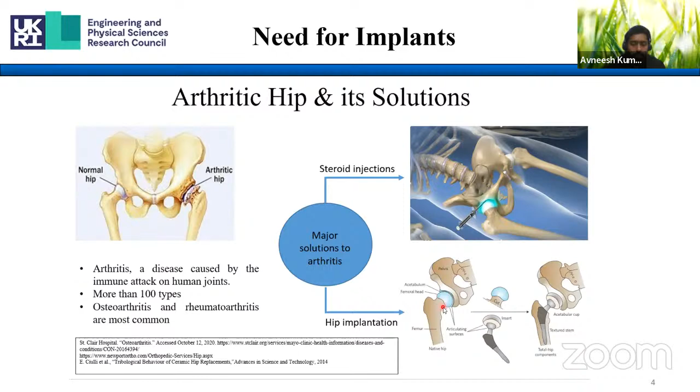The manufacturing of these implants is basically a two-step process. In the first step, they prepare the base part of the implants using advanced manufacturing techniques like additive manufacturing or casting. For that, people usually use stainless steel, cobalt, chromium, titanium, and also some polymers like ultra high molecular weight polyethylene, highly cross-linked polyethylene.

Then, to further enhance the properties of the surface of these implants, surface modification techniques have been used. They have tried machining these implants to get better tribological properties, or in some cases tried to improve surface roughness to get better biological properties, using grit blasting. Also, people have used coatings to get better biological, mechanical, or chemical properties.

For coatings, people have tried different materials, including titanium based alloys, hydroxyapatite, alumina, zirconia, and many more. The technologies explored include physical vapor deposition, chemical vapor deposition, sol-gel deposition, and thermal spraying. Thermal spray is also accepted as a biomedical coating technique by the US Food and Drug Administration.

In thermal spray, as we know, it basically contains three parts: one is the material that we want to deposit, another is a heat source required to melt or semi-melt this deposited particle, and then there is a carrier gas which propels this molten or semi-molten particle onto the substrate in order to form coatings.

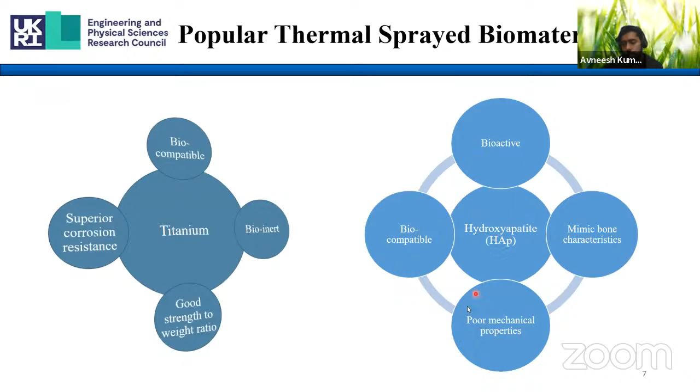On the other hand, hydroxyapatite is a mineral which mimics bone characteristics. It is a calcium phosphate compound, very biocompatible, but also bioactive in nature, which means it helps in bonding between the bone and the implant surface. It also helps in growth of cells onto these implant surfaces. But the problem with this material is its poor mechanical property.

In view of this, Professor Christopher has already discussed in his talk that they have developed coatings of calcium silicate compounds, which is baghdadite, using plasma spray, and they have also prepared hydroxyapatite based coatings, then compared both coatings in terms of their mechanical performance and biological performance.

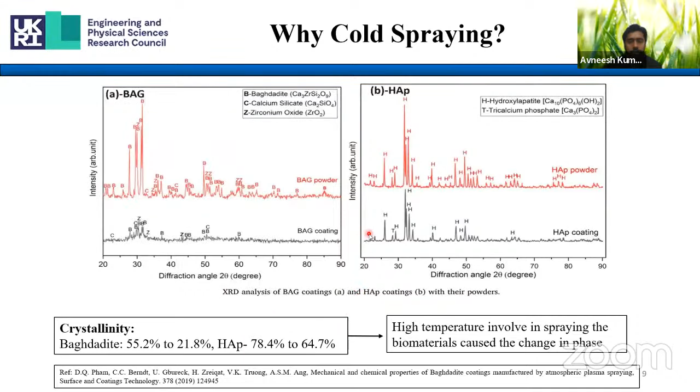So this phase change problem can be avoided using cold spray facility, because cold spray is basically a solid state deposition technology where micron size powder particles are propelled with supersonic velocity and strike the substrate to form bonding, mechanical bonding or metallurgical bonding. So to attain that supersonic velocity, a convergent divergent type of nozzle can be used.

So after that, as the particle strikes onto the substrate, it forms bonding, and that bonding can be described using several bonding mechanisms.

So the first one is oxide layer breakup. When this particle strikes with very high velocity onto the substrate, it breaks the oxide layer if there is any on the substrate, and forms a new surface for the bonding.

Similarly, there is another bonding mechanism which is adiabatic shear instability, which says that for a particle to adhere, there is a threshold value of velocity which it needs to reach. At that velocity, when it strikes, the particle deforms severely, along with a sudden rise in temperature observed at that particular velocity, and also the particle loses its flow strength. So when these three things happen together, this condition is known as adiabatic shear instability.

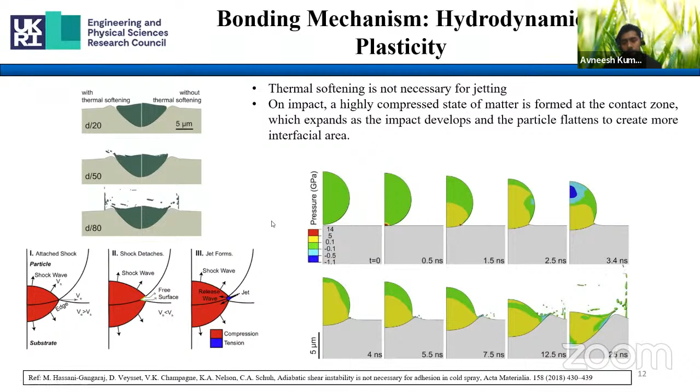Till now we have talked about metallic material bonding. Now what about ceramic particles? To see whether a ceramic particle retains onto the substrate surface, Rohan Chakrabarti with his group did simulations on different substrate conditions from softer to harder, and he saw that on a harder substrate the retention was minimum, but on a softer surface the retention was there.

As we all know, when a ceramic particle strikes with very high velocity, either it gets ruptured, fractured, fragmented, or it deforms very minutely. The retention of ceramic particles on the softer surface is connected with the crater depth - more the crater depth, better the retention. However, they said that if jetting occurs at the interface, then the retention will not be there, because this jetting will take the fragmented particle out from the surface.

Then they also saw the effect of grain size of the ceramic particle on retention. For that, they took a titanium oxide particle and impacted it onto a copper substrate with different grain sizes. They saw that a higher grain size particle retains more after impact, and the reason they gave is that the dissipation of kinetic energy through fracture is lower in this larger grain size case.

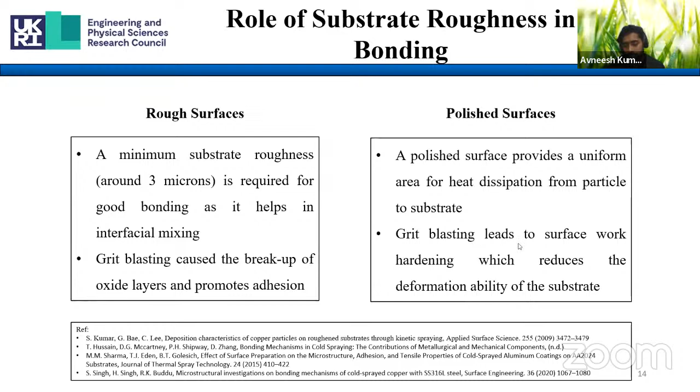So AR stands for as-received substrate. As-received means the average roughness value is around 5 microns, and for semi-polished it was around 0.5 micron, and for mirror polished surface it was around 0.03 micron.

As we discussed above in the bonding mechanism, jetting is the main reason for bonding. So to further see what is happening at the interface, we did some cross-sectional SEM image analysis of cold sprayed titanium particle.

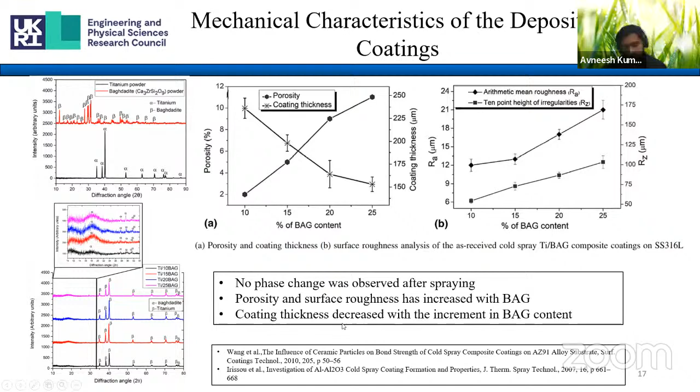Then we did some biocompatibility analysis. We put our already deposited coatings into an osteoblastic cell culture for 24 hours and monitored the cell viability, which is simply the live cells. The threshold value was 70%, and we were able to achieve more than 70% cell viability, which shows that all the coatings were biocompatible.

After that, we did some corrosion analysis in a simulated body fluid environment, that is Ringer solution, and we found that all the coatings were successful in protecting the substrate from corrosion. As the baghdadite content increased, the coating shifted towards the noble direction, meaning the stability of the coating increased in that environment.

We also did some SEM and EDS analysis of the corroded coatings to see what is happening on the surface, and we found that in all cases, oxygen content increased immensely. We also mapped the titanium 25% coating and found sodium, calcium, oxygen, silicon, and titanium present.

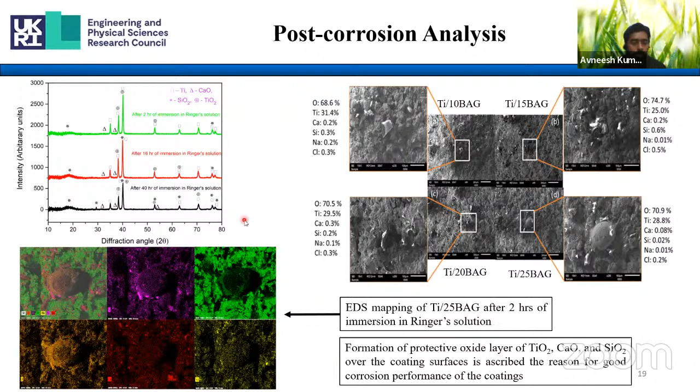To confirm whether oxide layers formed that protected the substrate surface, we did some XRD analysis. In the XRD, we found calcium oxide, silicon oxide, and titanium oxide, which helped protect the substrate from corrosion. Actually, they worked as a barrier to prevent electrolyte from penetrating through the coatings.

After that, we did some similar performance analysis using the pin on disk test. Before doing that, we did some micro hardness analysis on the cross section of these coatings.

From the cross-section micro hardness analysis, we realized that as the baghdadite content increases, the micro hardness value also increases, but there is a threshold value. After 15%, it decreases continuously.

This may be because as baghdadite content increases in the feedstock, it also influences the bonding between particles, interparticle bonding like between baghdadite and titanium, because it will interact with the titanium particle and affect the impact velocity of those particles. This further affects the deposition, so the cohesion strength of the coating also gets affected. That can be the reason for the decrease in micro hardness value.

In dry condition, we found that only one coating was able to protect the substrate, the titanium 15% baghdadite coating. However, the hardness of the 10% coating is higher than the substrate, and as Archard's wear law says wear rate is inversely proportional to the hardness of the coating surface, still the substrate had better wear resistance.

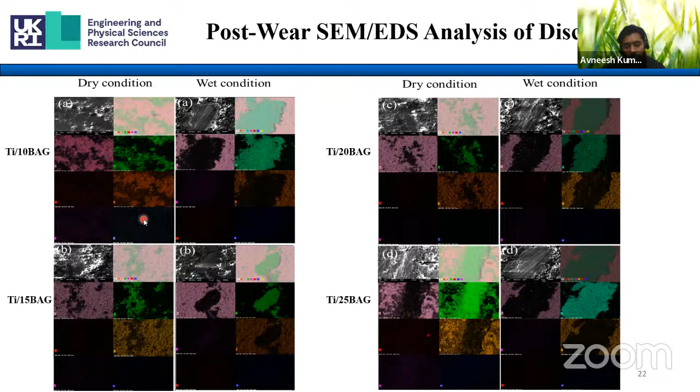The reason for that can be when one surface is rubbing the other, there will be a high temperature rise at the contact, and that high temperature rise causes the development of a weld junction between the coating and the substrate. This leads to transfer of material from the softer surface, the coating, to the counter surface, the alumina.

From this we concluded that we were successfully able to deposit a titanium based composite coating on SS316L substrate, and a significant amount of baghdadite was retained in the coating. The coating protected the SS316L substrate from corrosion because of the formation of calcium oxide, silicon oxide, and titanium oxide protective layers. Among all the investigated coatings, the 15% baghdadite composite coating was found to be the most successful in enhancing wear resistance.

This is because of the superior wear resistance and superior hardness of the 15% baghdadite composite coating. The wear mechanism we found was micro cutting, micro cracks, pitting, and delamination, which are features of abrasion. We also found mass transfer, which is a feature of adhesion, on the alumina counter surface.

After that, we also did some post laser treatment of the coatings, which we have not shown here, and those results are under consideration in a journal. So yeah, thank you for your patience.

Now I think I'm open for questions.

Thank you, Avneesh. Excellent presentation on the cold spray. So far it has been only on pure metals, ductile elements, and this is an eye opener to mix ductile with a brittle material to spray. I think it's a great initiative.

So my question was, if you sprayed it on 316, which is a hard substrate, right? Yes, sir. And you were able to get good adhesion with micro polishing, mirror finish kind of surface, right? Yes, sir, yes sir. So in the real world, if you were to do it, there will obviously be some challenges. If we have to do it on an implant, we obviously cannot get a mirror finish, but what do you think can be done there in a commercial world? How can we improve the adhesion of this material to commercialize it?

So, sir, initially, as I started my talk from the grit blasting thing, people were saying that grit blasting is good for adhesion. And then we have seen that mirror polish also helps in better bonding. But there are some cases where people say that whatever surface we receive in industry, or for implants also, that will give good adhesion, but relatively mirror polish substrate surface is giving better adhesion.

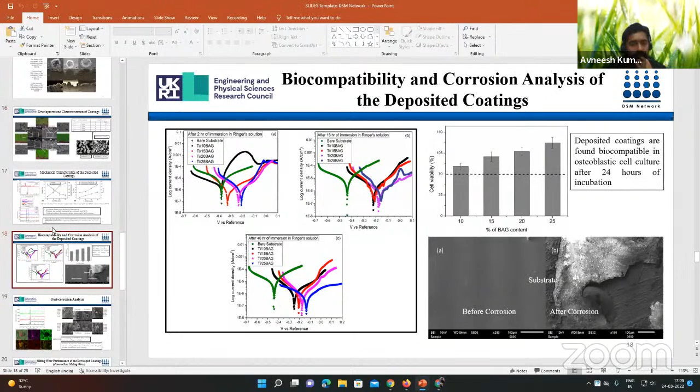In some cases, people have shown that surface preparation actually affects these properties also, like corrosion performance, and also properties like elastic modulus, micro hardness, or maybe in some cases thermal conductivity. People have reported that it gets influenced because of surface preparation. So that can be an interesting thing to look for.

Sure, I think very impressive work. Congratulations. Thank you very much, sir. Okay, thanks a lot, Vish.

So Avneesh, I have a few questions, not technical type. I see that you were present in some of the other talks also on the same days. So as an ECR, how do you see this type of event has benefited you or groomed you with this kind of exposure to talks from other experts? How has this helped you and your career?

So sir, first of all, I would like to say thanks to the DSM Network also, because they have given us the opportunity to understand what is going on in thermal spray area nowadays. We have learned a lot from the experts, like what type of work they have done in the area of thermal spray. I am now aware of biomedical things and what my supervisor is working on nowadays. But when you see around the globe, how people are working in thermal spray, how they try to improve facilities, and how they try to predict different properties of coatings, like using AI or simulations, that is quite interesting to see. So it helped me immensely to know about things which I never knew earlier. It was great help.

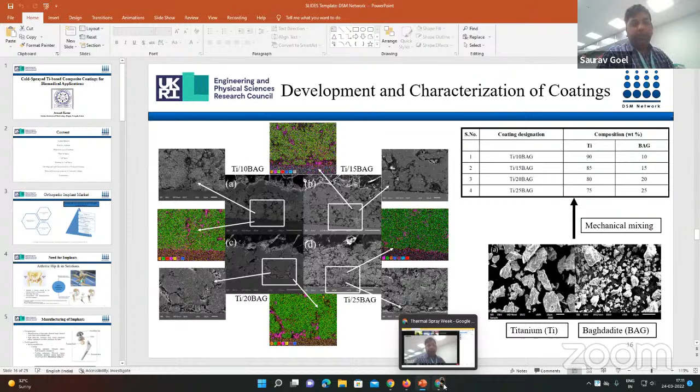Okay, and in your own perception, or in your own judgment, because you are coming from IIT Ropar based in India, which area in thermal spray manufacturing do you see that your institution or India needs more push or momentum?

So right now, I think this biomedical thing is very important and very interesting. Very few people are working on it in my IIT, I think nobody is working on these things. Harpreet sir is working in thermal spray, but not exactly for the manufacturing of implants. So we have explored the coatings, but not exactly how we can prepare the full-fledged implant. So these things, I think, we should look for. Other than that, hot corrosion, that is sir's expertise, in hot corrosion and cyclic oxidation type things. They have published some patents also on that. So in that way we can improve the performance of different components in industries, and it can help economically also.

Okay. And in your personal ambition, do you have aspirations to join academia or to go to industry? No, sir, I wanted to do some research things, from the academia point of view, and then I'll see what opportunity I will have, because I want to explore more in research things, maybe in industry also.

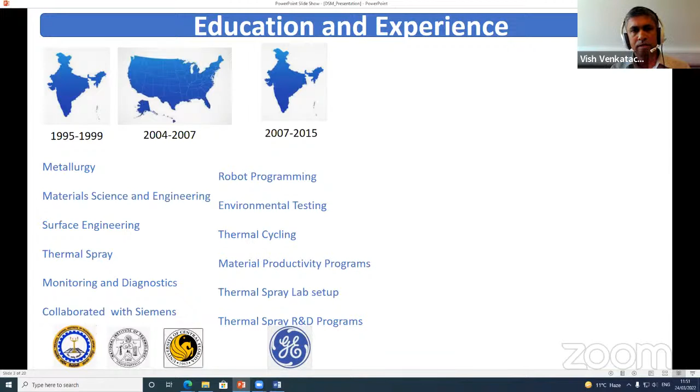We ran several R&D programs for oxidation coatings, like high melting point bond coats for thermal barrier coatings. So primarily I worked on the new make side of GE to develop coatings. Then I had an opportunity to move on to the repair side.

From 2016, I moved to the Middle East, looking at coatings repair, diffusion coatings, non-standard offerings for Middle East customers. Robotic programming was still part of my job on the repairs portion of it, and I developed a lot of coatings for the Middle East customers, power generation for the 6B and 9E turbine frames.

Shortly after that, I moved to Southeast Asia, primarily based out of Singapore, for GE, working on aeroderivative engines, coatings for the LM2500, land and marine, we call it. There is plenty of coatings that goes into that product. That engine is used primarily for propelling the ship, as well as small scale land turbines.

Most of the coatings that you will see coming out of Southeast Asia, the parameters were probably developed by me for the last 3 years. It has been a big privilege for me to develop and deploy coatings for manufacturing such high technology applications.

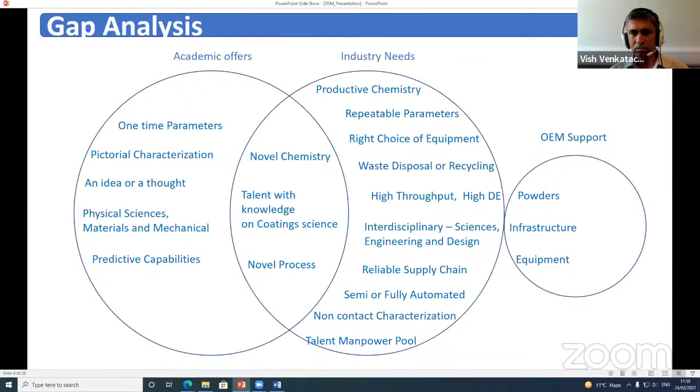If you look at sustainable thermal spray, the first thing to consider when spraying a powder or a coating is: OEM will give us a parameter—is it relevant to my equipment? You might have an HVOF system, but the OEM powder is actually made for plasma spray. So things of that nature.

Do we have the gases that the OEM is suggesting? And if I take that OEM parameter and spray multiple times, am I going to get a repeatable microstructure? Am I using the right gun to not waste a lot of powder? Am I putting a lot of powder on the floor?

Can I improve the deposition efficiency? Can I spray faster for the same thickness and get the parts out? Is there a better gun to save cost and time? Can I use a larger bore plasma spray instead of a narrow bore? And what is the long-term maintenance cost of the equipment? Am I going to keep changing my nozzle and hardware, or my chiller system or power supply, to sustain that kind of customer volume?

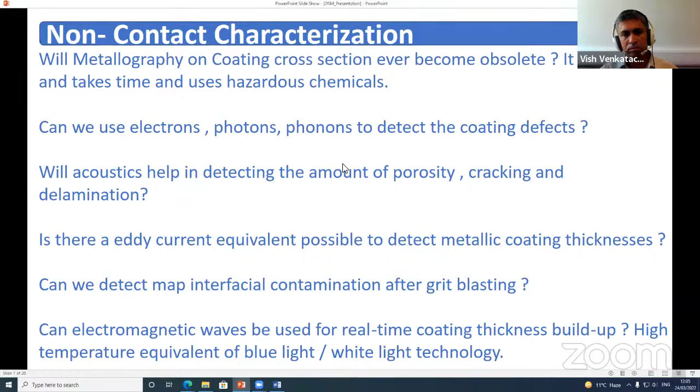More often, the cutting edge talk going on in industry is whether we can use electromagnetic waves, not just light in the optical range, to determine coating thickness as the coating is depositing live. Right now, there are white light and blue light technologies available after the part is coated and cooled, but not to an extent where, when it is currently being coated, we have that technology to take it forward.

So thermal spray has a lot of variables, right? It's going to be confusing for a novice to look at so many parameters and see which ones to change and which ones not to change. So if you have to end up automating this process or semi-automating it, what are the things we need to look at?

Primarily, we have gas flows, spray distance, robot speed. Can we turn these knobs favorably to get a coating, right? So what we do now is an Accuraspray window wherein we study the temperature, velocity, and intensity of the plume, and say everything is within range, and we get the microstructure out.

The next feature, which the industry is going to demand and we have to move towards, is getting these parameters in a measurement window and changing the gas flows and input parameters seamlessly and automatically using a robot.

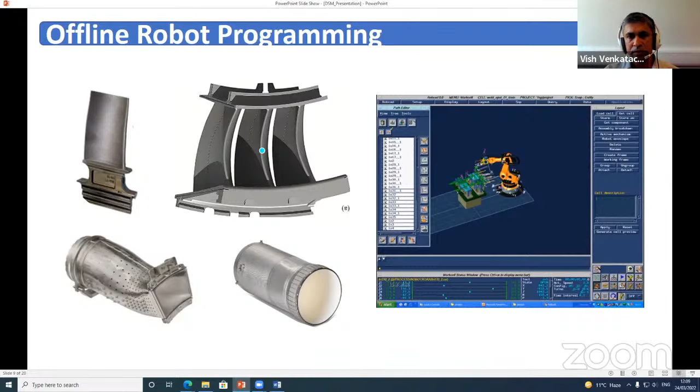A lot of work is going on to substitute for yttrium. Please note that these lanthanides are available in only one country in the world, and we don't know how the supply chain is going to be, in terms of whether we're going to keep relying on that one country to supply thermal spray ingredients to the whole world. We need to look at alternatives, right?

How can we move away from this? Yttrium itself is a critical raw material, and so are many others—for example, chromium is hazardous. How can we move away from chromium? Can we use less nickel, less cobalt? Recycling is key to avoiding tapping into this lanthanide series, and it's a must. These are the challenges materials-wise, and now industries are talking about hydrogen turbines and high efficiency turbines, right?

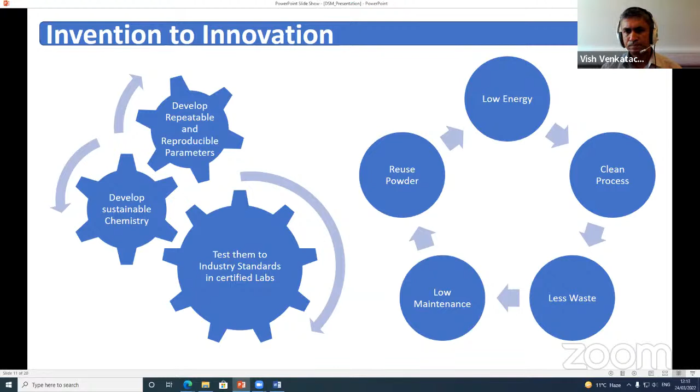Looking at some of the opportunities, I've jotted down a few here. Can we look at improving the manufacturability of perovskite cells, calcium titanate, using thermal spray or solution precursor plasma spray? That would be a great approach. It's a niche area, and I think a lot of renewable industries would be more excited to get that kind of technology.

Erosion in wind turbine blades is still a problem. We have wind turbine blades in GE, especially. If you look at some of the high rain monsoon areas, the rain droplet sizes are so small that the leading edge of the wind turbine gets eroded, and sometimes we have to scrap the whole blade, which is a highly environmentally hazardous way of disposing those blades. So if we can use thermal spray to do erosion protection of those leading edges, it will be a great support.

Another option I was thinking of: with so many stainless steels just to keep them from corrosion or erosion, hardness, high hardness, tool steel applications - if we can induct more carbon steels just by doing thermal spray substitution, I think we can save a lot of energy and save a lot of nickel and chromium.

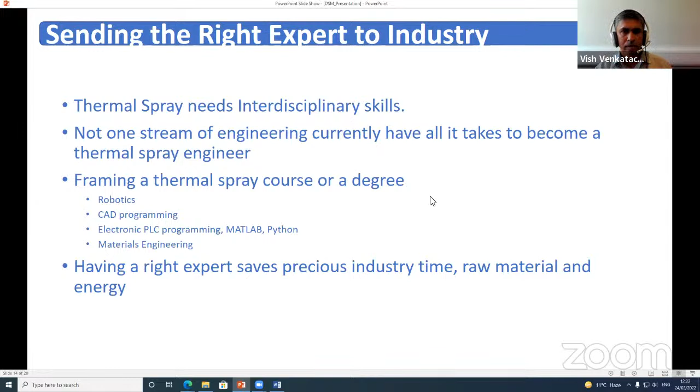I think we could take out hydrocarbons, acetylene, and similar things, and instead use hydrogen as a process fuel, along with argon and helium, which would contribute positively to the environment. Also, a lot of epoxy products get wasted during thermal spray - masking is a big waste that gets generated and goes to landfill. If we could have sustainable organic masking technologies, it would help reduce this waste.

Here are a few more thoughts on how we can collaborate. Polyesters are used in abradables, like the shrouds of turbine engines, the blade tip, and the casing. Polyesters increase porosity in TBCs to get that abradable functionality. If we could inject more recycled polyesters into abradables, I think we have a good scheme of things there.

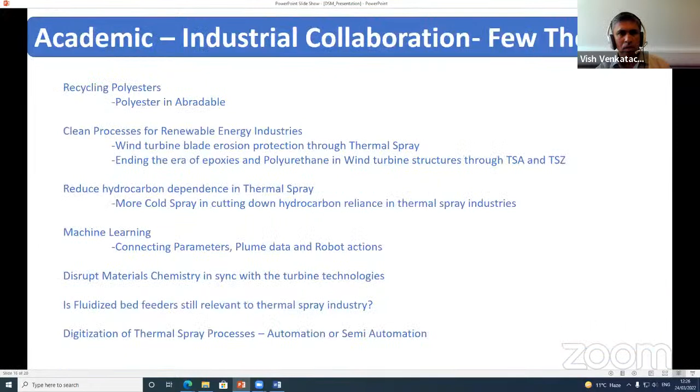So with that, I think I'll just briefly go through what I have done in my PhD. I've developed some free-form nanostructures like tubes and rods using cermets and aluminum oxide, using thermal spray and solution precursors, plasma spray.

To improve the flowability, I have used spray dryer of these nano powders. Mostly ceramics and nitrides and polysilicide, hafnium tungsten, hafnium carbide.

I think we could scale up. All these technologies can be scaled up, and with the right talent, we could work more closely and collaborate to get things done.

My experience is mostly on thermal spray, monitoring diagnostics. I worked with these guns, and we should be able to collaborate.

We have a thermal spray facility in London South Bank University, mostly plasma spray, but we could do a lot of collaboration in terms of leveraging each other's infrastructure needs, like cold spray in India and solution precursor spray, plasma spray in University West.

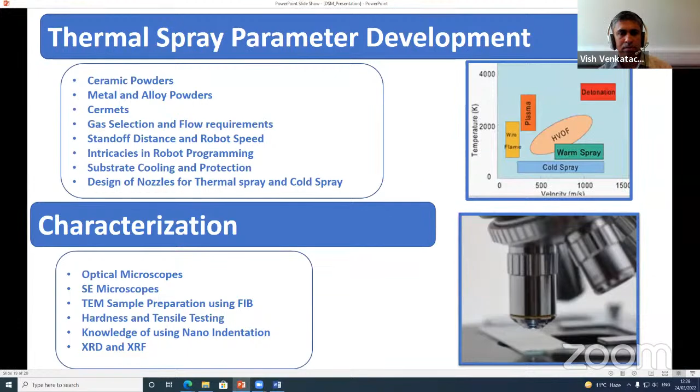So with that, I would like to end this presentation. I think it's running about 45 minutes, and yeah, so we will work more closely with these networks and technologies and with the right talent. I think it's time to work together.

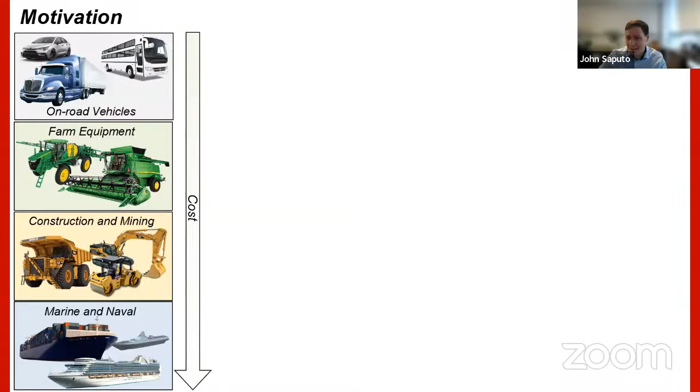I apologize, these are all in American units, everything I'm about to show. I probably should have thought about putting these in SI, but hopefully this still translates well. As you go down in this list, you increase in cost generally. Something like an on-road vehicle will be on the order of $10,000 - your car will cost $10,000, $20,000, and maybe something like a bus or truck will be a lot higher. But just for demonstrative purposes, I think this is suitable.

As you go down, you approach marine and naval equipment that can often be on the order of $10 million. At the same time, the difficulty of replacing internal combustion engines in these systems also increases. That's a hard metric to really hammer out, but I chose to look at torque in these systems - a metric electric motors generally excel in. Something like your car, in English units, would produce on the order of 100 foot-pounds of torque.

Maybe that's something like 150 Newton meters. Then as you get to the other end of the scale, something like marine and naval engines are producing on the order of 1 million foot-pounds of torque. It's one of these applications where there just isn't a practical alternative to an internal combustion engine.

At the same time, the environmental impact of these things gets worse and worse as you move down in this list. That's difficult to quantify, but I'm putting this in cumulative tons of CO2 emitted by each category. If you look at all on-road vehicles in the world, they produce something like 10 to the 9 tons of CO2. As you go down the list, you see it immediately drops down and then picks back up again.

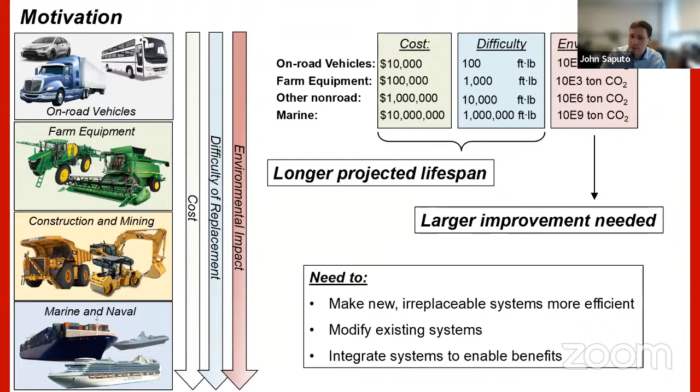So I'm going to call out 3 specific things that I think we need to do here. One is to make these new irreplaceable systems more efficient. The second is to modify existing systems to be more efficient. And the third is to integrate these systems into more environmentally friendly areas.

So the first example I'll give is a container ship. This is a Wärtsilä-Sulzer 96C engine. You can see there's people in that bottom image, and these things are the size of a house. I think this specific engine outputs about 7 million foot-pounds of torque, and there's literally no replacement for this thing out there.

The second example I'll give is military combat vehicles. A lot of these things have very specific performance requirements that there aren't a lot of alternatives to, and they tend to have really long lifespans. This is a vehicle that was introduced in the 1960s that's still in the field today. You can see that they're constantly introducing these things that rely on these sort of old dirty technologies, and are expected to have very long lifespans.

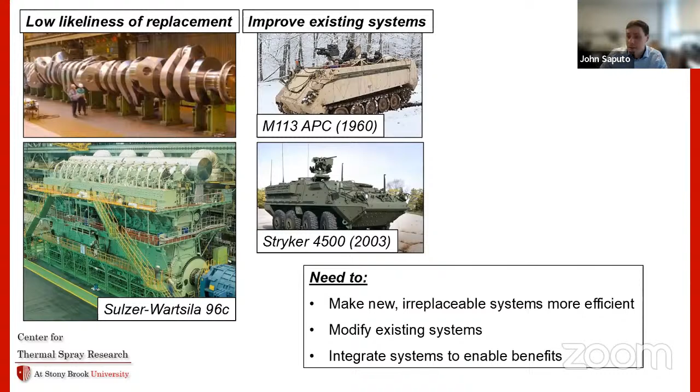At the same time, you have things like integrating them to enable systemic benefits. So this is an example of things like wind or solar that produce intermittent power, and you could possibly supplement those things with internal combustion engines, which can ramp up to produce power really rapidly, which is a kind of unique attribute of those systems.

So altogether, you're probably not likely to see any of these things have practical replacements for 50 to 60 years. So even though environmentally friendly green technologies are really popular and have a lot of research going on in them, there's still a deep need to pursue higher efficiency in these systems.

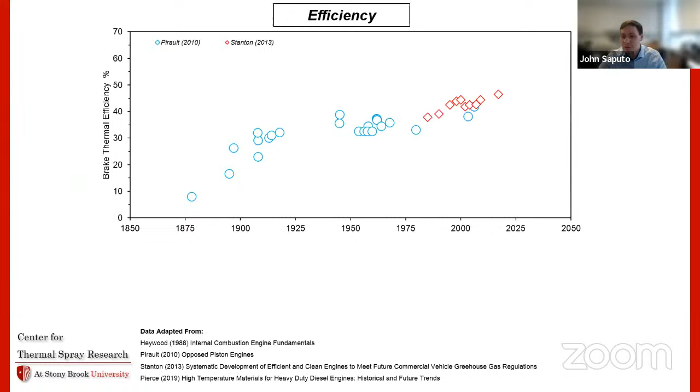So talking about efficiency, it's good to give you a lay of the land. What does it actually look like for these systems? You go back to the 1870s and you can see Rudolf Diesel's first engine had an efficiency of about 8%. And you go to a modern day high output diesel engine from 2020 at the other end of this, and see it's about 46%.

So it's interesting, you get about a 40% improvement over the span of about 150 years. Over the past 70 years, you only see an 8% improvement. So that's kind of interesting. Things saturate after about 50 years of improvement and have gone really slowly since then.

So if you look at this in the future, what do people expect to happen? There's projections that in the next 30 years or so, you'll see about a 14% improvement in efficiency in these systems. Considering that there's only been 8% in the past 70 years, 14% seems like a suspicious number.

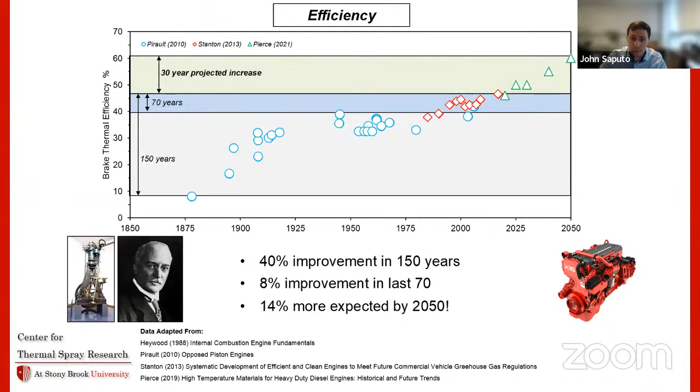But you can look at how people in this field project that this will actually work. So there's a couple of things that people look at. The first is looking at efficiency versus peak cylinder pressure.

Some of the ideas that people have in this field is that you can just increase the working pressure that these things operate at. You increase the amount of work that comes out of an engine, and the efficiency of it will go up. So increasing the pressure has a direct correlation to increases in efficiency, and is projected to have about 1 to 3% impact on that total 14% that I mentioned.

So looking at each of these things, this first option is systemically simple. It's just a simple modification to the way that you're already running an engine, but because you have these increases in pressure, it's thermodynamically linked to temperature, and you start to push the thermal limits of the materials that are used to make these engines.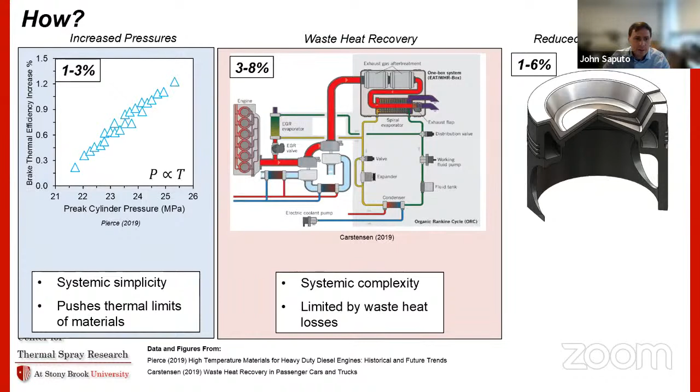The middle option here is systemically complex but readily achievable, and is also thermally limited. So you're not pushing the thermal limits of materials in these systems, but you're limited by waste heat through the

hot gas pathways in an engine. And this third option is also systemically simple. You don't need to add an extra system to a diesel engine. You can just modify existing components to possibly gain additional performance benefits. But again, it needs unique thermal insulating materials. So these are three categories of things that can all be enabled by the use of coatings.

So I'm going to talk about this reduced thermal losses mostly, and then maybe loop back to this first idea of increased pressures and the thermal limits of materials if we have time. So, reduced thermal losses - I have a little subtitle there, or 6 years of TBCs at the CTSR.

So we've been working on this idea in collaboration with the US Army for around 6 years now. And if you look at the total fuel energy that goes into an engine, about 50%, 55% of that is actually losses, and 45% of it goes to usable power. Of those losses, about 25% are thermal, 30% leave through the exhaust gas, and then there's some other portion of that that's mechanical frictional losses and things like that.

Of the 25% that are thermal losses, about 23% leave the system during the combustion, expansion, and exhaust strokes. And then about 2% of that is heat that's generated by friction. So from the 23%, there's 19% of that that just goes out of the system as waste heat, conducts through the walls of the piston during those strokes, and about 6% that's potentially usable as work in these systems.

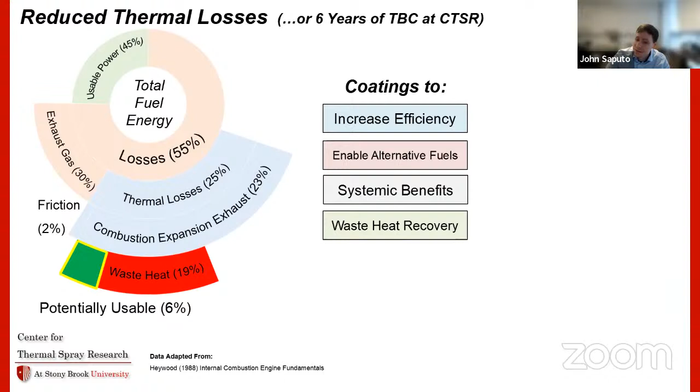So part of the idea is that you can use coatings in these systems to directly increase the efficiency by harnessing that potentially usable energy as work. But there are a couple other things you can do at the same time, like enable the use of alternative fuels, maybe gain some systemic benefits, or keep more of the heat in the system so that it could be recovered by a secondary system like I showed in the previous slide.

I'll go over two specific examples of how coatings on pistons can be used in high-performance diesel engines and be used to enable the use of biofuels.

So this idea isn't exactly new. It turns out people have been trying to use coatings in these systems since as early as about the 1920s. This is an example taken from a Scientific American magazine where a guy is literally painting a ceramic on the inside of an engine in the 20s. Back then, this was referred to as catalytic coatings, and they were used in early spark ignition engines.

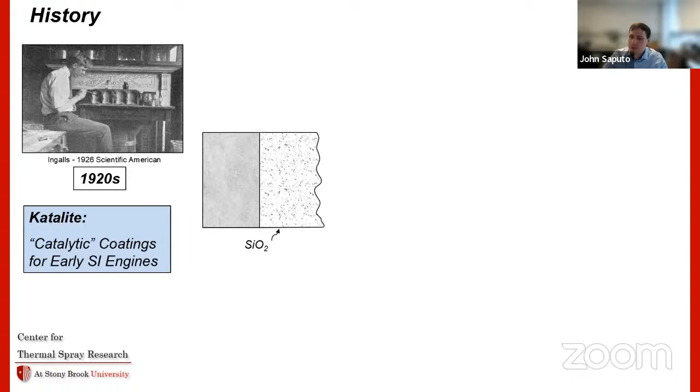Part of the idea was that you could have some wall material, you could apply silica, which is what he's painting on as a slurry coating there, and then put a layer of cerium oxide on the surface. So normally in an engine, you would have some combustion process and hot gas traveling over the surface. In this environment, they imagined that the hot gases would interact with the cerium oxide particles that are on the surface, have some catalytic reaction that would allow the combustion process to proceed to a fuller

combustion. So if you look at what they actually measured out of these things, this is a plot of basically efficiency versus the pounds of fuel that they put into the engine per hour. And you can see that the catalytic coated engine was always more efficient than the uncoated engine, and they used less fuel. So it's interesting that back in the time that they were doing this, there's a really poor understanding

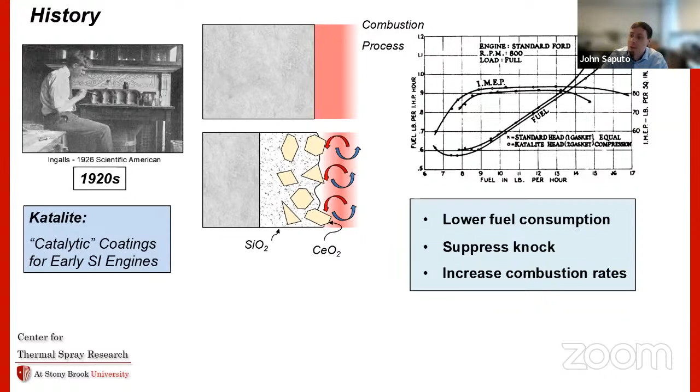of how engines worked, and they didn't really understand the implications of these coatings on these systems. But what they got out of it was that they had lower fuel consumption. They suppressed knock and allowed them to go to higher pressures. Going to higher pressures allowed them to go to higher efficiencies and have increased rates of combustion. But as soon as you introduce leaded gases, which happened shortly after these were being used, those issues with knock went away, and they didn't really see the performance benefits that they got from going to those increased pressures. So the poor understanding of engine dynamics at this time sort of drowned this out.

And there's an interesting aspect of this, whereas you have a silica coating on the surface, which has a conductivity of maybe on the order of something like 1 watt per meter Kelvin, versus the steel or aluminum that it would have been made out of, which would be 40 to 100 watts per meter Kelvin.

So it might actually have been one of the first early TBCs that you'd see in the system. The real first examples of this come in the 1970s, and were given specifically for marine life extension. So these are traditional TBC materials, derivatives of something that would be used in the aerospace industries, and they're used to reduce hot corrosion in these systems caused by the really impure fuels used in marine engines.

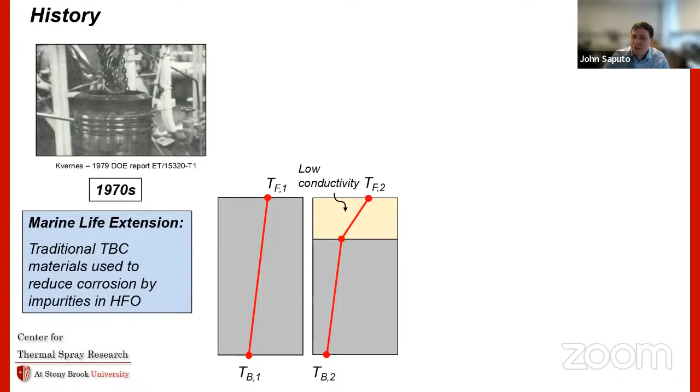So this idea is kind of simple. You have a thermal gradient that runs through one of these systems. You put a low conductivity material on the surface, and the temperature will drop, giving you a lower component temperature at the backside. It's widely used in aerospace and they tried to transition it over to this industry.

So this is an example of a zirconia TBC that was tested for about 1,000 hours in a marine engine, and you see no real damage. At this time it was only speculated that this could cause benefits to the thermal aspects of the system.

So this is a dirty old piece of paper taken from a Department of Energy report. It's kind of difficult to spot in here, but I'll call out these numbers they gave, projecting that you could have a reduction in the heat flux that travels through the wall in these systems. But they didn't actually do any measurements of this. They did see it successfully suppress hot corrosion in these systems.

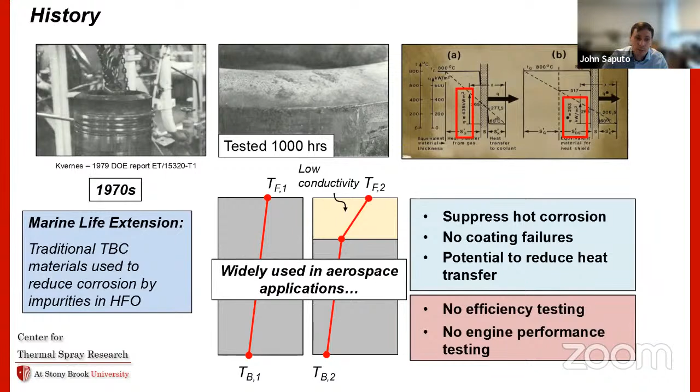They didn't really see many failures in the coatings at this time, and they predicted there might be a potential to reduce heat transfer. But there's no actual efficiency testing and no engine performance testing. All they looked at was whether these coatings reduced the corrosion rate seen on pistons.

This idea sort of ran off in the 80s and turned into this concept called the adiabatic engine. Part of the idea was that, hey, you could make things out of ceramic inside of these systems. Ceramics can live at higher temperatures, and maybe you can remove the cooling system in these systems, which is this dramatic, revolutionary idea.

So people took this idea all the way to a platform scale. This is an example of an adiabatic engine that was part of a Cummins TACOM joint program, where they did remove the complete cooling system from this engine, then coated all the internal components with ceramics and did platform-level performance testing. This is another example looking at fuel consumption versus load on the engine.

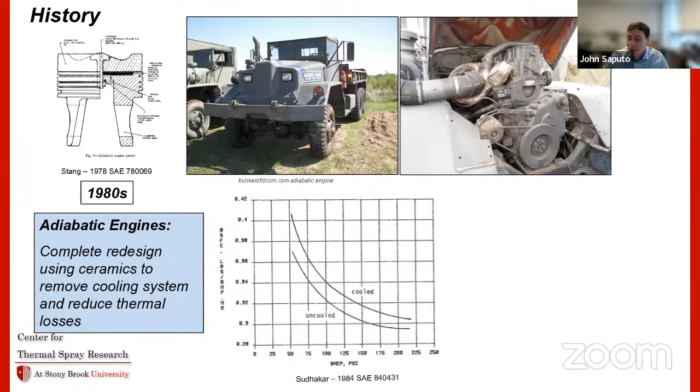You can see at every point that they test that the uncooled engine is more efficient than the cooled engine, which isn't really a great surprise. But they only saw about a 4% gain in efficiency and a 60% reduction in heat transfer losses, which is kind of interesting.

The interesting thing is that the majority of those performance benefits actually come from removing the cooling system. So you're removing this parasitic loss that normally gets taken away from the engine, and not necessarily gaining performance benefits from directly having the ceramic components.

At the same time, because they removed the cooling system, the temperatures get really high and you see issues with lubricants. The oil on the cylinder liner and things like that start to get too hot and burn. There are issues with durability from trying to replace all these complex components with ceramics, and the efficiency gains mostly came from removing that cooling system.

So in the 80s and 90s, you see people start to look at these things and try to actually gain performance benefits through insulation. The idea at this time was they would use coatings on the order of 1 millimeter thick, just adding them onto existing components to try to augment heat transfer.

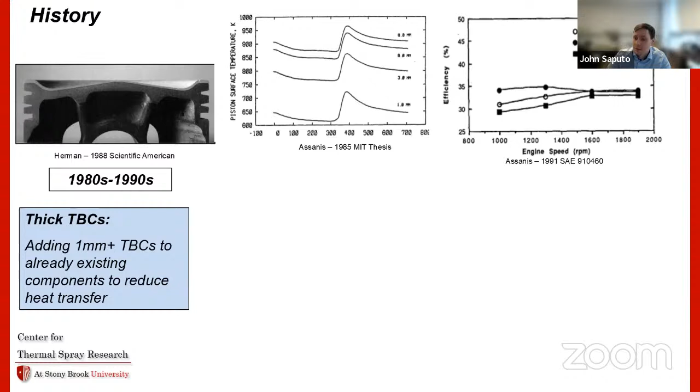So this performance testing shows interesting results that using a thinner ceramic actually performs better than a thicker ceramic. So this tells you that even though you have a higher insulation capacity from these thick ceramics, they perform worse. And that's partially due to the heating of the intake gases.

It's interesting, there's theoretical predictions about this made as early as the mid 80s, showing that these thinner ceramic coatings, as you move to higher frequencies, could possibly perform better. So overall, this period in time can be summarized by degraded performance from thick ceramics, the potential to use thin coatings has some benefit, and because people were using these thick brittle ceramics, there were some pretty severe durability issues.

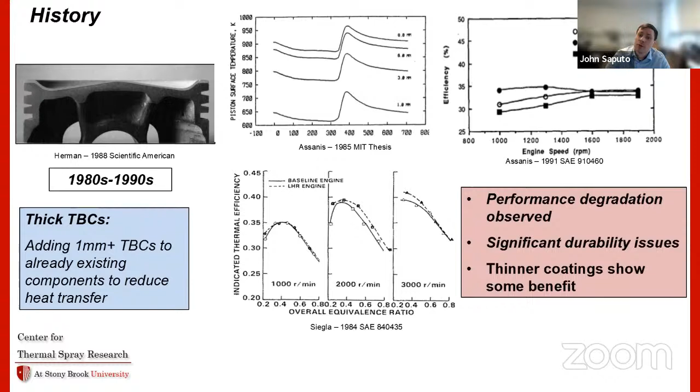So that leads you into the present state of thinking in this field. From about the 1990s to now, people have had this idea that you can use thin coatings to gain performance benefits in these systems. So I'm giving an example of maybe a 30 micron thick TBC that comes from Toyota, that's not made by thermal spray, but made by a different process. And these coatings are generally something like temperature swing or thermal swing coatings that are used to reduce convective heat transfer in these systems.

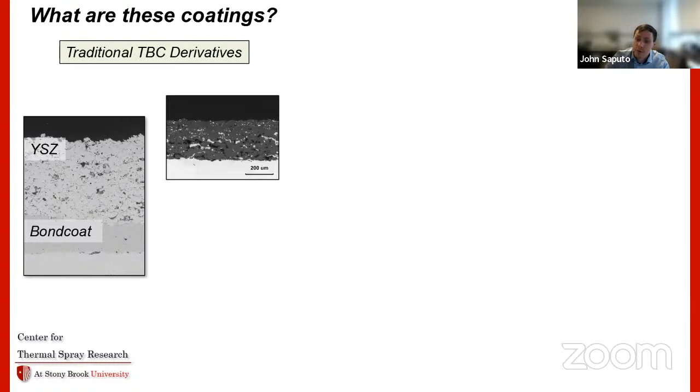So what are these coatings is probably the next thing to address. A lot of them are traditional TBC derivatives, so you have something like a YSZ top coat and a superalloy NiCrAlY bond coat that are used in most examples. And then you have things that are some sort of derivative of that, like functionally graded materials. You have suspension spray coatings that people are working on as well. And then sort of alternative TBC materials, things like gadolinium zirconate that people at Clemson University have tested.

And then you have this whole class of things that I consider novel coatings, these thermal swing materials. So this is a picture of the material that we've been working with that I'll get into detail a little bit about, but they're generally low density, low specific heat materials that are designed to have that temperature swing effect that I talked about.

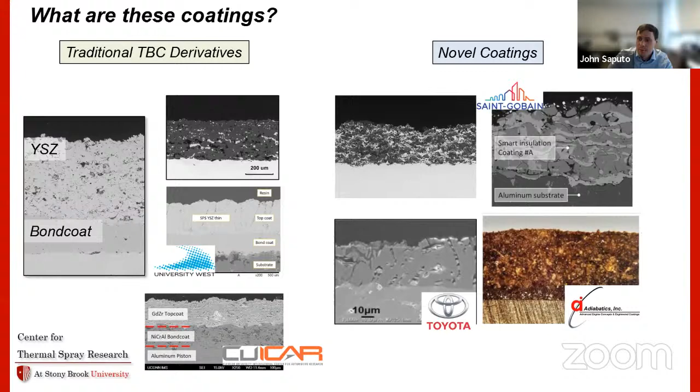So I think two of these are plasma sprayed TBCs. One of them is an anodized aluminum coating, and then the other one is a slurry coating. But they're all sort of tuned to have specific thermal properties and aren't derivatives of traditional thermal barriers.

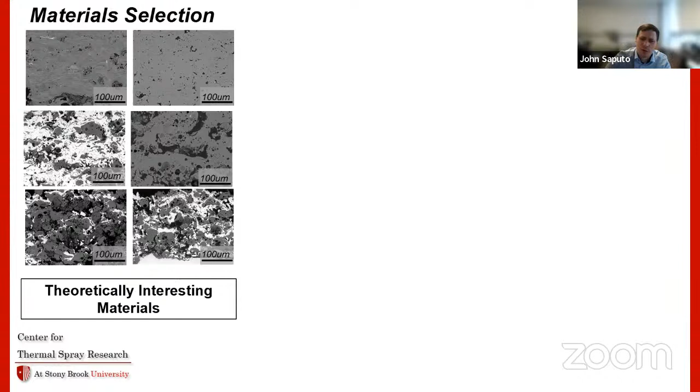So these specific materials are these 6 things here. They're all magnesia-aluminosilicates. The 3 examples I'm giving are mullite, which has been used in the aero industry, and steatite and cordierite, which are less commonly used. They're all really, well, 2 of them are really brittle, low conductivity, low density ceramics. And then the other 3 are actually composites developed using these brittle materials, toughened with zirconia. So we know these have the properties of interest that we want.

But we want to know, do they actually perform in an application? Are they suitable for an engine, before you put them into an actual combustion engine test? So we came up with a rapid screening methodology to figure out if they behave like we want them to, and if they're suitable materials.

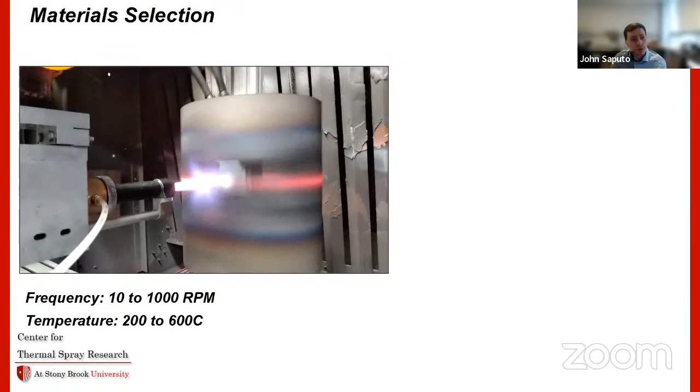So we're just using an HVOF torch and a spinning shutter. It's a steel cylinder with a hole in the center, and it rips around the coated sample and gets rapidly shocked by this HVOF torch. We're able to do this at frequencies between 10 and 1,000 RPMs and push temperatures between 200 and 600 C, making it relevant to conditions you might see in an engine.

So we can do this test and record the surface temperature transients using a thermal imaging camera, to really understand what's happening to these coatings in these systems.

So the data you get out of this looks something like this. Each one of these cycles rapidly swings back and forth. This is 10 minutes of continuous exposure, about 1,000 cycles, and it's useful for both traditional TBCs and these novel materials I was talking about.

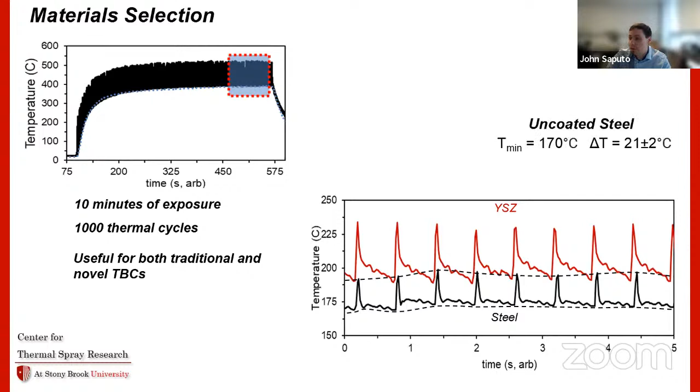You can zoom in on one of these sections and see what happens during this cycle. The steel is the black line, zirconia, a traditional TBC, is the red line, and there's two interesting things you get out of it. The first is that temperature jump I was talking about before. For steel, it's about 21 degrees, and that baseline temperature is about 170 C. For zirconia, the temperature swing is about 40 degrees, and the baseline temperature jumps up, which would be bad because it would degrade the thermodynamic efficiency of an engine by heating the intake gases.

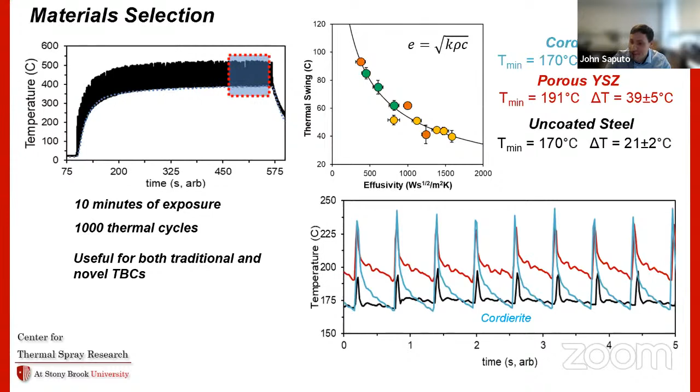And you can lay this out with, theoretically, how some simple heat transfer correlations work. You could look at that thermal swing versus thermal effusivity, which is defined as the square root of conductivity, density, and specific heat, and it should trend inversely proportional to that temperature swing. So that's exactly what we see. It works that way for a broad swath of materials, so these things should work great in these systems.

But you still need to get these things onto a piston.

So these generally look like something like this. You want to move a spray torch across this surface, keeping it normal the entire time in order to develop a uniform coating across the surface.

So these pistons are something like 120 to 150 millimeters in diameter, and they're huge. Doing metallography on these things, trying to understand if you have the proper microstructure across every location on this piston, is complicated. We came up with these little strips that fit on this component, mock geometries, that you can quickly destructively test to figure these things out, and it allows you to rapidly develop that tool path to get optimal coating microstructure and thickness.

So when you're spraying these coatings, it looks something like this. We're generally rotating these parts and traversing the torch along the center line, keeping it normal the entire time. If I look at one single feature here, called the bowl edge, it generally has a specified dimension as fine as about 30 microns, which is kind of difficult to do with some spray processes.

So as you receive this, it looks something like this. The first iteration of developing the coating tool path on top of this looks something like that. You turn that 30 microns into 500, and it's actually kind of terrible for these systems.

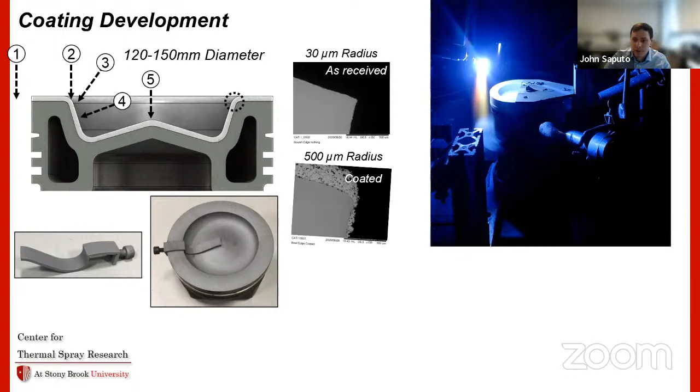So using those strips I showed on the left, you can iteratively go through this procedure of a brute force optimization, making the coating more uniform and more uniform as you go until you get a uniform coating across the entire profile.

That's really important because the bowl geometries in these high performance diesel engines are often designed using computational fluid dynamics. People predict that deviations on the order of hundreds of microns in these systems can cause a larger change to the combustion process than the presence of the coating, which is kind of interesting.

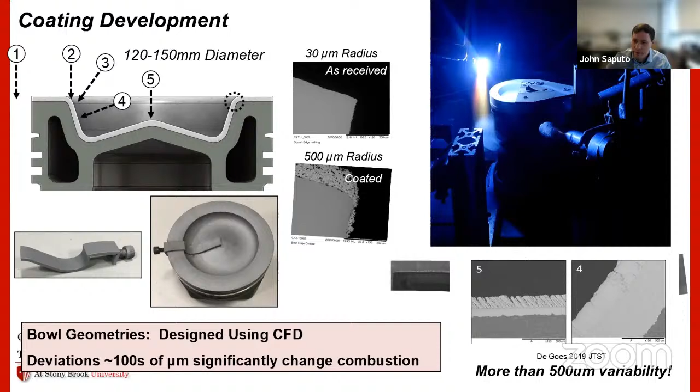If you go back and look at the literature, you'll see a lot of examples of coating variability across the piston profile varying by as much as 0.5 millimeter, which would make decoupling the effects of the change in bowl geometry versus the coating materials in these systems basically infeasible.

Just to give a brief summary of the work we've done at CTSR with this, we've gone through this cycle of doing laboratory tests, developing coatings on piston crowns, and then doing single cylinder performance engine tests, using that as a feedback loop to continually develop better and better coatings.

Doing this, we've tested about 20 TBC varieties from coupons all the way to engine test, which is interesting. So the first work we did was just looking at traditional derivatives of aerospace TBCs.

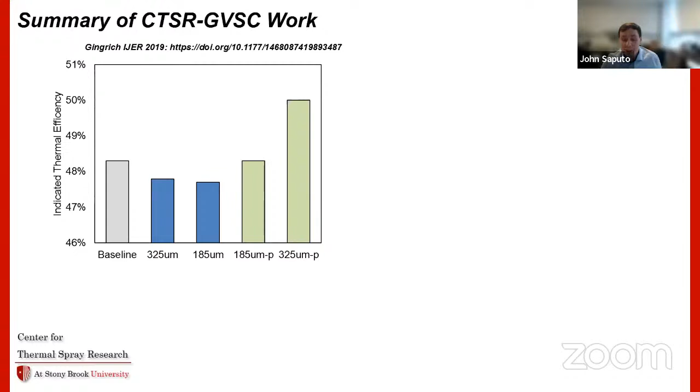If you look at a baseline engine, it's about 48.5% efficiency. The first coatings we put in are these blue bars, and you can see that that drops down. We're looking at about a 185 micron thick coating and a 325 micron thick coating that cause this performance degradation, which is kind of interesting.

And you do that and it turns into the green bars on the right. All of a sudden you see this performance degradation turn into a performance benefit, and that performance benefit is proportional to the coating thickness. So as you go to that 185 to 325 micron thick coating that's polished on the right, that increment increases, which is good.

So looking at the surface of these things, it's an as-sprayed roughness of about 12 microns, polished down to about 6. You can see that it starts out really chaotic and random, and then as you polish it turns into this nice plateaued surface with some pits across it. We can clearly correlate that surface roughness effect to the performance in the engine, which is interesting.

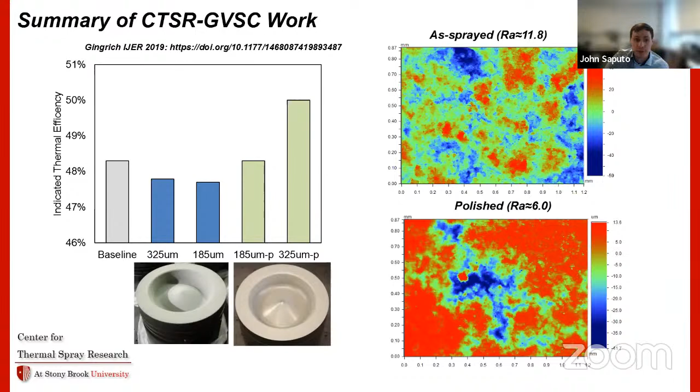They're totally chaotic and have all these really small scale features. As you polish it out, you still see pits on the surface that we thought may have some interaction with the combustion process. So to get rid of this, we decided we can just tune our process variables and spray a dense thin coating on top to seal all of that up.

We apply this dense sealing layer on top, that's that portion of the TBC, and at the same time put a whole lot of work into trying to make a metallic phase dispersed in that to toughen the ceramic, so we can make it more homogeneous. We get better control over the uniformity of the thickness of the coating across the piston, and it gives us better control of properties at the same time.

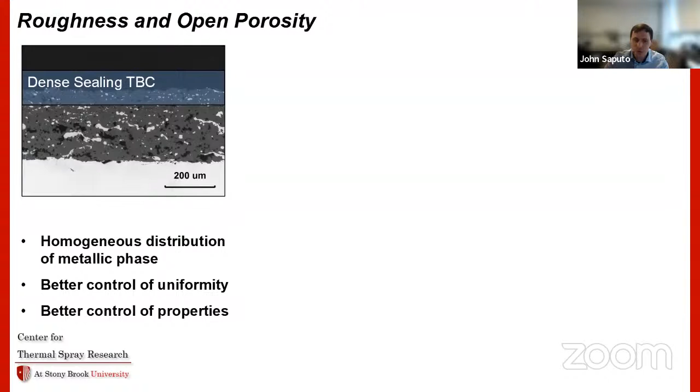So all this kind of came together - better control, better understanding. We should have better coatings that come out of this. Our original coating looks something like that - you have all these big open surface pores, you put the sealing layer on top, and they all go away. Everything looks great, right? Except when you do engine performance testing with this, you see no change in the efficiency, which is kind of interesting.

This story is going to get a bit repetitive, and I'm going to say the same thing like 6 times in a row. We've tried a whole bunch of things and seen really similar results. So our thought from this is that we have this dispersed metallic phase inside of this.

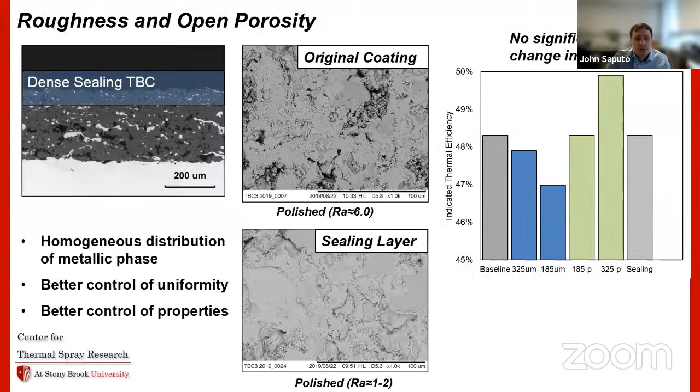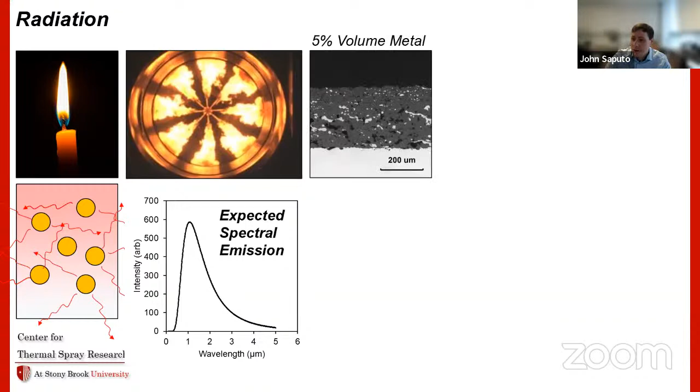So if you look at the spectral emissions that come out of these, there's a peak between about 1 and 2 microns - that's the expected maximum radiation that would come out of these things, taking the adiabatic flame temperature of a stoichiometric mixture of diesel fuel and air. If you look at the coatings, they have this 5% added metal volume fraction.

If you look at the expected optical properties of these things, you can see that the reflectivity - which is a decent metric, analog to the absorption of radiation in these systems - is about 20%. If you look at a traditional thermal barrier coating, like a pure ceramic coating, those are about 70 to 80% reflective over that spectral range in this kind of system, which is interesting.

So by adding that metal, we're toughening it, which is great. And we're not changing the thermal conductivity or anything like that, but the propensity for radiative transfer is going up by a factor of about 3 just by adding that metal into the system. So our thought was, maybe that's bad - maybe that's what we should be trying to take down in these systems.

So again, you can take a piston with 5% metal volume fraction like we tested before, remove that, and tune the thermal properties - the conductivity - of these systems to be about the same, and do performance testing. You see absolutely no change, which is kind of interesting again.

So we decided to go from this to the thing that everybody's been driving towards in the new system, which is these thermal swing materials. This is that cordierite zirconia composite - the same thing I showed you, the blue, nice temperature-following coating that we had before.

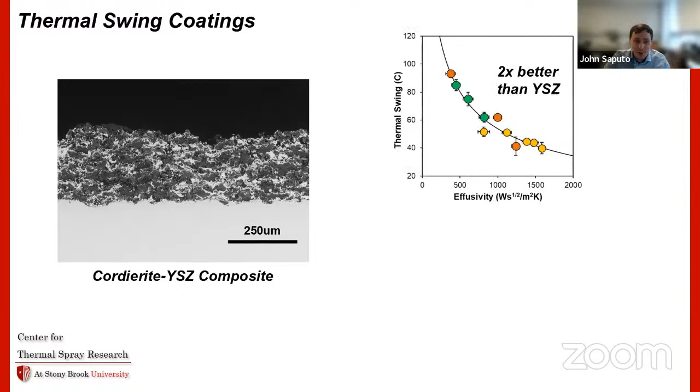We know that this performs in laboratory tests, by all metrics, about 2 times better than YSZ. It's predicted to fall into a range where it should get about 2% change in engine efficiency based on all these simulations. It's got a conductivity of about half zirconia. So by all metrics, this thing should be a good engine coating material.

But we also did 3 variants of thicknesses in this - about 150, 180, and 370 microns, in case that's an issue. We did see that earlier. But for all of these cases, we see absolutely no change to engine performance.

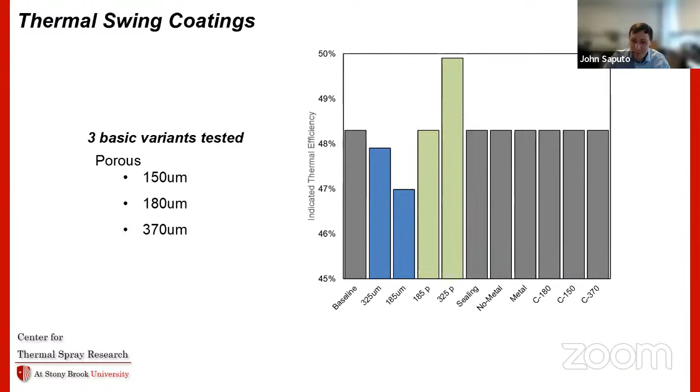It's 9 to 10 microns, so it is a bit higher, and maybe that's the reason. So we got new powders, developed a new spray process. Using a slightly denser coating, you can get lower surface roughness. We were able to knock the final as-sprayed pistons down to about 6 microns RA and put this in an engine again, and again you see absolutely no difference.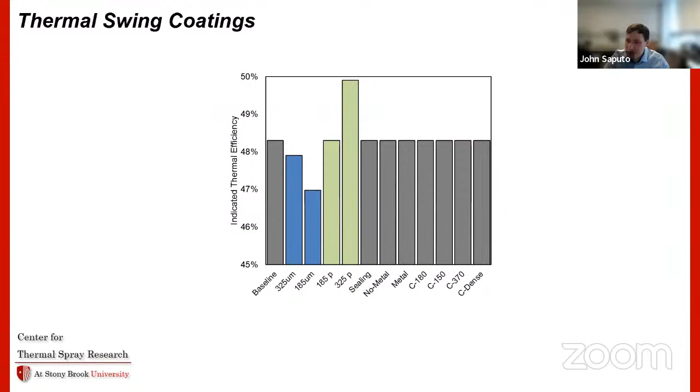So our thought process went to something like, maybe the coatings actually influence combustion in some other way. Normally you have this complex bowl geometry, with fuel flowing and air mixing into the system at the same time, and maybe there's some other interactions we're not thinking about happening in this system.

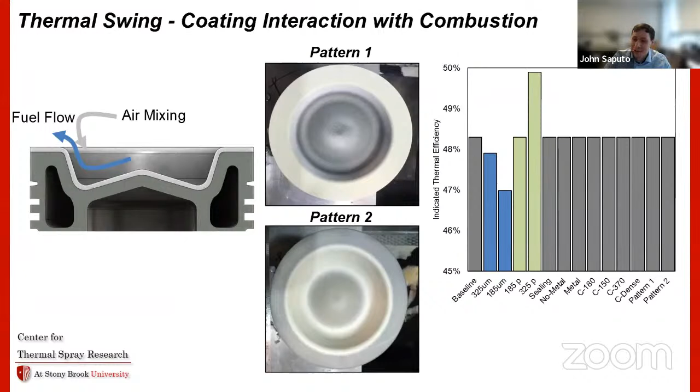So we decided to make pattern coatings. You can only coat this outer edge of the piston where there's little air fuel mixing happening, little of that interaction with the combustion process, and then do the exact opposite, do this inner portion. But when you do this, something miraculous happens - absolutely nothing. So it's beginning to be a bit of a repetitive story here that you don't see a lot of change in efficiency in these systems, basically no matter what you do.

So this is the sort of high performance diesel testing that I was talking about before. We did this to death - about 20 engine tests performed using thermal swing coatings, patternation, zirconia coatings, changing the thicknesses, using different sealings, different microstructures, radiation coatings. There's a lot I didn't even talk about here. We tested coatings that were up to the millimeter scale in thickness. Didn't really see any changes from any of this.

We did things that were just low conductivity metals, and then some instrumentation testing that I'll talk about a bit later, and then went back and did a bunch of uncoated engine tests. What you end up seeing is that the range of variability in these systems is kind of huge - we're seeing about 47 to 48% change in just the uncoated tests, which is outside of the variation you're seeing in the tests using all these different TBCs.

There are some things that lie outside of that range, some below and some above, but those benefits are rather small. So at most they're about 0.5% that you could potentially gain from doing this, but it would be really difficult to actually get everything tuned exactly right to do that.

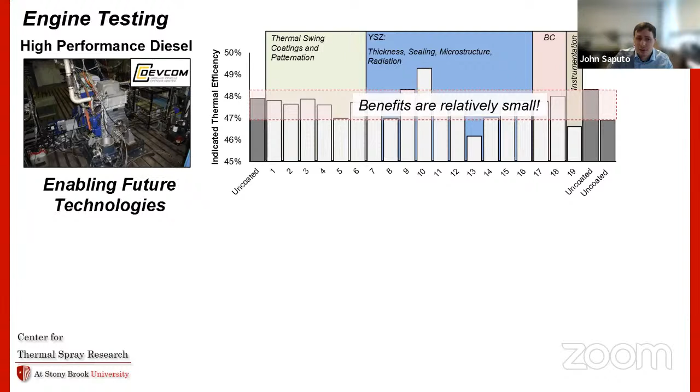So instead of getting direct performance benefits from these things, you can go into enabling different technologies. One of those big things is biofuels.

So this is work that we did with Clemson, and it gets interesting. Use a lot of these same coatings and compare it to a baseline engine, and you immediately just see the performance go up. In these systems where there are current limitations, you can see that just the baseline engine performance in this is about 44.5%. For that high performance diesel engine, it was 48%. So you're already starting lower and there's more room to move upwards, which is kind of interesting.

And you can immediately start gaining benefits from that, which is great. So in these systems, there is this direct significant benefit that enables these biofuels, which have issues, to combust and perform like a more traditional engine. So increased efficiency directly - kind of questionable. Use of alternative fuels - absolutely. Systemic benefits and waste heat recovery - kind of questionable.

So I think I started a bit early with this. If you guys want to keep this going, I can talk about the last section, or I can cut it off now.

Saurav, I don't know how you feel about this. You're sort of leading this session.

What's that, John? So I can keep going with this for a little bit. I know it's 9 o'clock. I don't know what time you guys wanted to end this. I could probably ramble on for another like half hour or so if you guys want me to. Perhaps, yeah, can do about 15-20 minutes. Sure, yeah, okay.

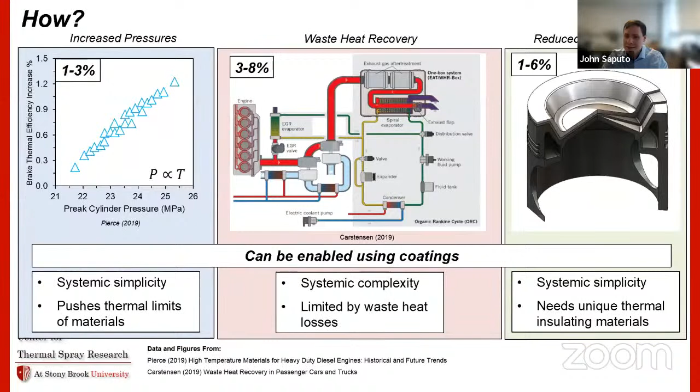So I can talk about how coatings can actually enable you to do this and possibly alleviate some of the issues that you see with this.

So increasing cylinder pressures is interesting. We already went over, you increase pressure and the increment in efficiency that you have is linear, but you run into big issues with temperatures. So these are generally thermally limited systems to begin with.

So I'm giving two examples here. The top one is a marine engine, where you see that when stuff gets too hot, you're literally just burning away the piston material. And the bottom example is an automotive head with a valve in it, where things get too hot and you burn through the valves. So there's a lot of materials limitations in terms of temperature in these systems.

A lot of them are made out of something like 4140 or microalloyed steels, at least in the high performance diesel engines. Automotive engines, something like cars, are usually aluminum silicon alloys that operate at much lower temperatures. But these things are steels that are meant to operate on the range of about 300 degrees C.

So as you increase the temperatures in these systems, two things happen. One is that you start to oxidize. You have hot corrosion in these systems as well, but we won't really get into that. And then the second thing is that the tensile strength or the yield strength of these materials will start to bomb out around 400, 500 degrees.

So there is a range here where the mechanical properties of these systems aren't really degraded enough to stop them from performing in these systems, but they do rapidly oxidize, which is the issue that people have been running into trying to go to these higher pressures in these systems.

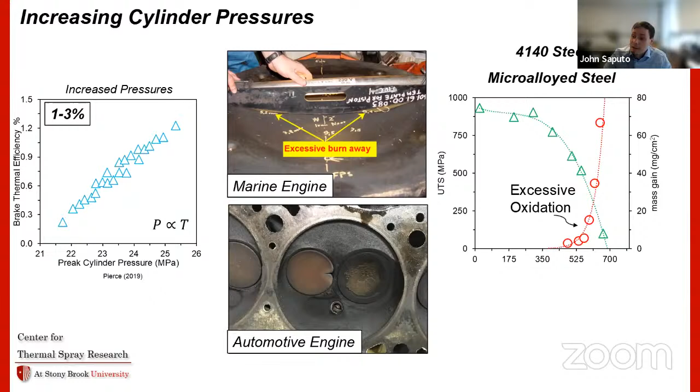So that's sort of the thing that we can drive down and hope to make go away with coatings. So in these severe operating conditions, you really need some metrics inside of these systems outside of things like efficiency that we were looking at before.

So the way you get that is, this is work that we did using telemetry pistons. Each one of those red lines that I'm showing on this sectional CAD model of a piston represents the location of a thermocouple implanted inside of a piston.

So this is what this thing actually looks like, some electronics that are screwed on to one edge there that transmit data. And then you can see at the bottom that silver line, thermocouple leads that are taped to go to this telemetry system.

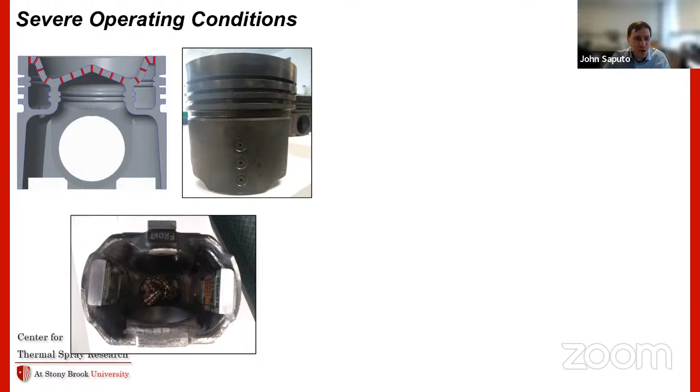So the first work that was done with this was just looking at an uncoated piston. There's no coatings. We want to just know what happens when you push these pressures and temperatures in these systems. So you don't actually want to increase the pressures in these systems for an engine that's not built to do that, but you want to go to the temperatures that are relevant for the next generation of engines.

So the way that our collaborators did this, work from the Ground Vehicle Systems Center, was just to reduce the oil cooling that goes into these systems. So you can basically just shut off the oil that normally cools the piston and see how the temperature gradually climbs up. They're able to push things to about 515, 520 degrees Celsius, which is on the order of what people are expecting these increased pressure increments to push temperatures to in these systems.

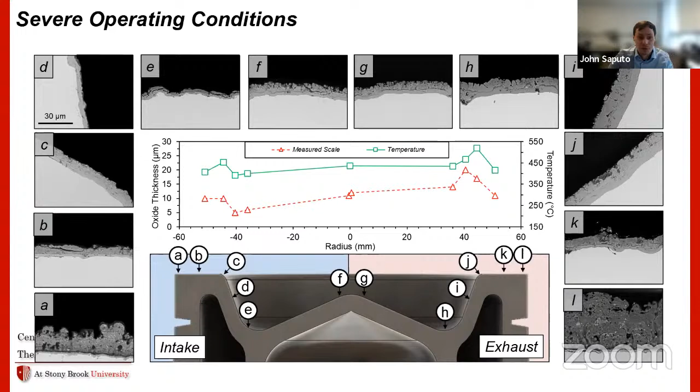There's two specific locations that I'll go into detail here, L and J. Start with L because it looks the worst. But it turns out L isn't actually oxidation.

It's not real degradation happening in the system. If you look at it, you can do elemental maps of this and figure out that it's mostly comprised of calcium, phosphorus, sulfur, magnesium, aluminum. So these are impurities in the fuel and oil, it turns out.

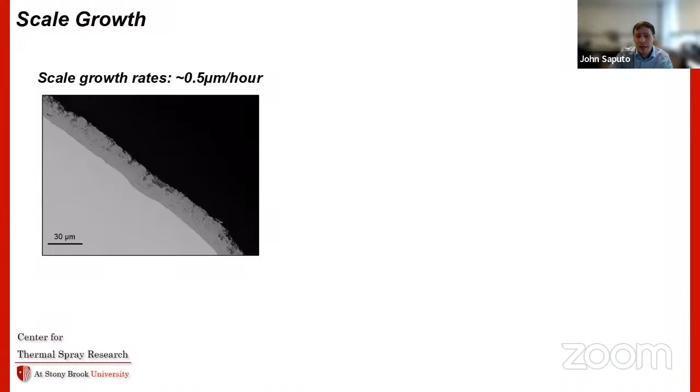If you look at that other region I called out, you have about a 20 micron thick scale that forms, which would be a scale growth of about 0.5 microns an hour. That number might seem small, but you've got to remember the service lives of these things are on the order of 10,000, 100,000 hours or something like that. So that kind of scale growth for those service times would be absolutely detrimental to these systems. You'd be looking at burning through the entire piston by the time it got to its service life. This scale growth differs at different positions too. I'm showing different temperatures we measured for the intake and exhaust scale side, and it would be better or worse in some of these regions.

So the first idea is that you can just slap an oxidation resistant coating on top of these things. So that's what we did. This is a NiCrAlY coating that performs really well in these high temperature oxidizing environments. We put it through that same degradation test, and it comes out looking something like this. Compare that to an uncoated piston, and it actually looks kind of great.

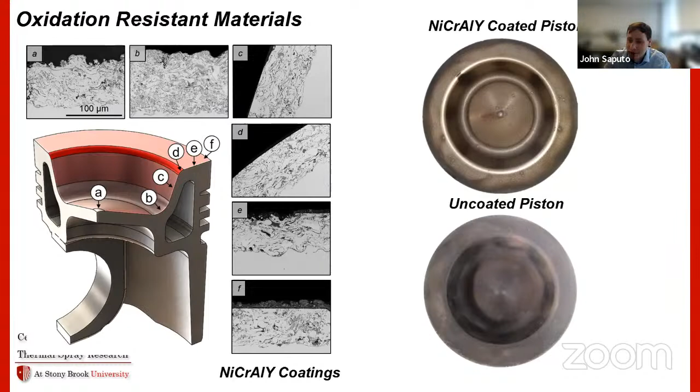You can kind of see it's still shiny. It does have some charring around that outside edge, you can see where the air and fuel combust on the surface, and those little periodic arrangements around it in a circle. You can look at cross-sectional micrographs of this after testing here on the left, and you don't really see any degradation to the system. This is after 50 hours of testing at 519 C.

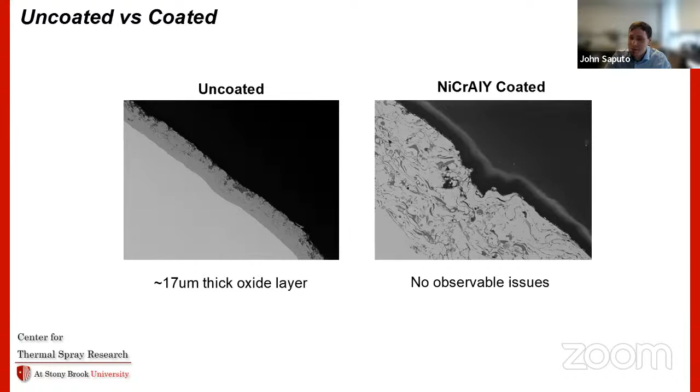You can directly compare the NiCrAlY coated and the uncoated piston, and you see none of that oxidizing damage that you'd see in the uncoated piston, which is great. All those issues just kind of go away. So this really enables you to go to these higher temperatures in these systems and not have too many issues.

There are still other benefits possible to gain out of this. Going back to these telemetry pistons, you can put a thermal barrier coating on top of these things now and look at how the temperature actually reduces in these systems. The blue curve here is a TBC coated piston, and the red curve is an uncoated piston. You see a couple of interesting things: first, the temperature is reduced for basically every condition that we test. A temperature reduction in these systems is thermodynamically related to a reduction in heat transfer losses.

You can do some basic math, and it'll tell you that you have about an 8% reduction in heat transfer in the system, which is interesting, because in all of the engine tests we do, you don't see any performance benefits. So what that tells you is that even though you're reducing the heat transfer through the piston by 8%, none of it goes to work, which is kind of interesting.

So it tells you it could go one of two places. The first is that it could go out through the exhaust gas stream and not be converted into any useful mechanical energy in the system. The second thing is that it could leave as heat transfer through other parts of the engine, either lost to the head, the valves, the cylinder wall, or along the hot gas pathway in the exhaust stream.

The second interesting thing is that to get equivalent temperatures, you see a 60% reduction in the oil cooling that's needed, which is kind of interesting. So you could reduce the pumping losses that go into the oil cooling system, or another option would be to have the TBC and let it run cooler, so your lubricants would last longer. Both of these are interesting options that could enable systemic benefits in these systems.

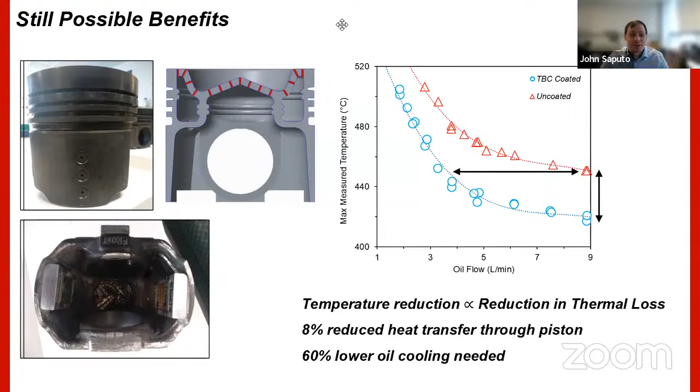What happened, John? Sorry, I think that about wraps up everything I've got for this. I can take any questions anybody has. Oh, okay, so your computer got hung, it seems. Right, okay.

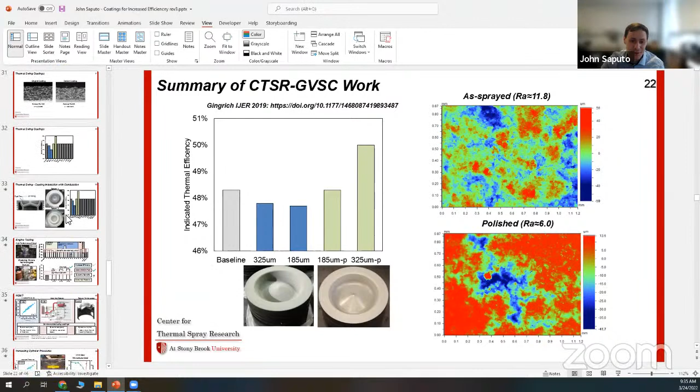I actually saw a thesis recently from the Indian Institute of Technology, Kharagpur, where they carried out thermal spray coating on hard surfaces, and then carried out a precision manufacturing operation on it, specifically abrasive flow finishing polishing. One argument they made was that because polishing is a force-controlled process, you can't afford to go higher in forces anticipating higher material removal, because if you do that, the coating might delaminate. So there's a threshold force in polishing that you need to control.